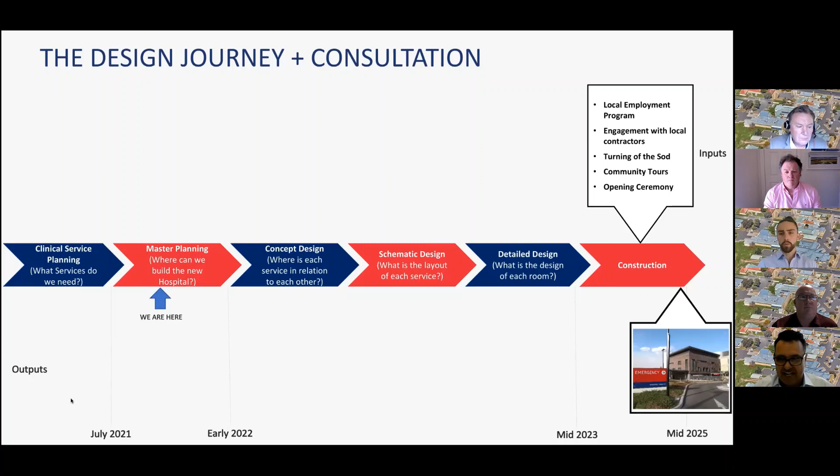There'll be a number of ceremonial opportunities for staff and community to engage, like turning the first sod. There'll be tours and an opening ceremony, of course. There's a lot more detail behind that, but I just wanted to give you a sense of the major areas and touch points throughout the project. And at the end, we hope to deliver you an exceptional building.

I'm going to introduce Mark Brockbank, Director of Rural and Regional for Health Infrastructure. Whenever we have a major project in New South Wales, Health Infrastructure plays a senior role in partnering with the district and local staff to help deliver that project. They have exceptional expertise in delivering large-scale projects, and Mark is probably the best person they have. We're incredibly lucky to have him on this project, and he's a good man despite coming from South Africa. He's embedded himself in rural New South Wales, and I'll hand over to Mark now to introduce the rest of the team.

Thank you, Ramsey. I trust you all can hear me. Thank you for the introduction, and thank you for your comprehensive presentation regarding the program and the process. I'm pleased to be representing Health Infrastructure today on this project and joining you on this virtual update. To support the planning of the project, we have pulled together a genuinely skilled team, and they will be working alongside Ramsey's team, the Hunter New England team, and with you and the community. So I'd like to introduce you.

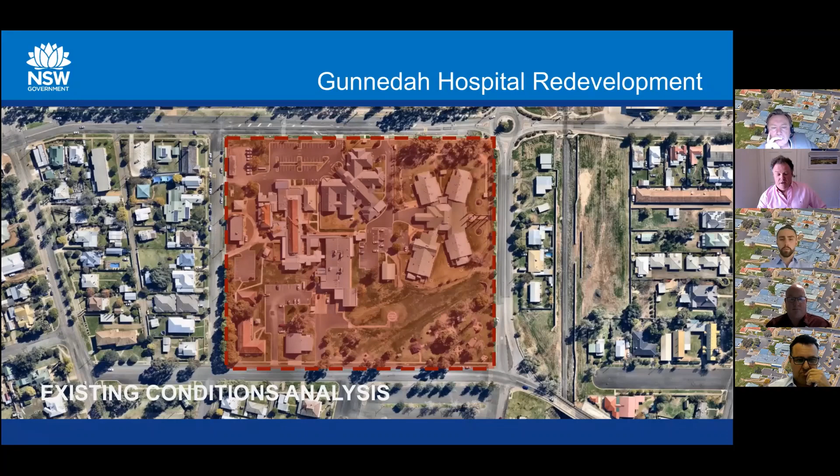It's really important that when we're doing master planning, we have to understand the site. This is crucial to what we're doing, so we understand everything that's in the site, everything that's around the site. Because we are just doing this master plan for the current scheme, but we've also got to think of the future as well, and what the site can be used for, as we move through it. So obviously that's the hospital site.

What we start off with is, and I'll just run through some of the slides that we've done, just to give you an idea of the amount of work that we do. So you can see that the red box, which has got the dotted lines on it, that's the site I just showed you there. That's the Gunnedah Hospital site.

So we look at the planning legislation to let us know what the land is zoned for, what we can do with the heights, what we can do with the land, what we can do with everything round about it.

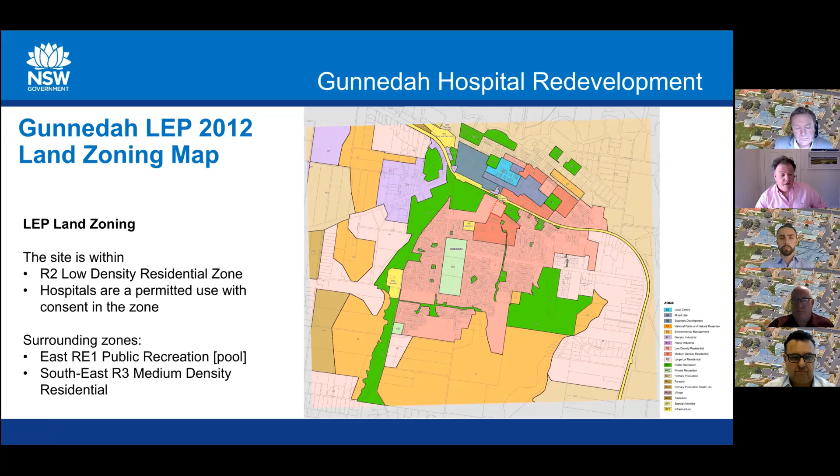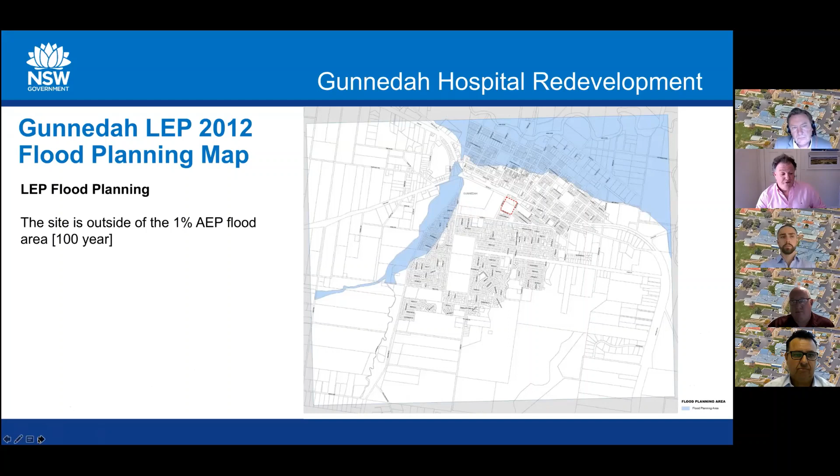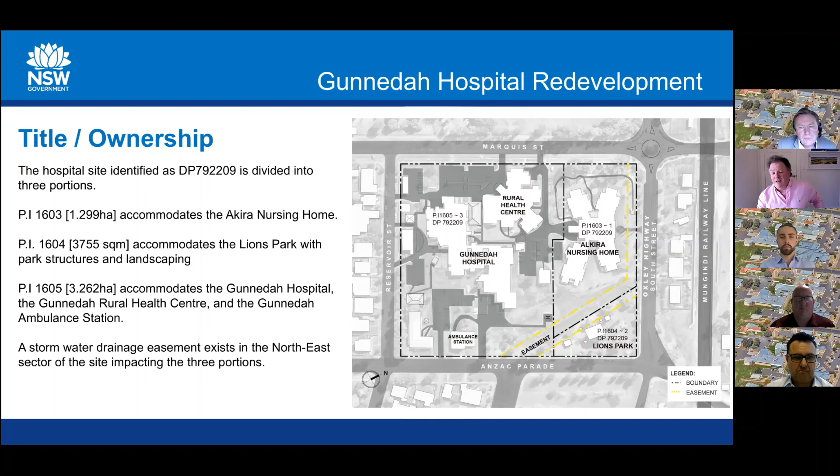What's also important is that we've found the easement for the drainage channel that runs through the site, sort of cutting Lions Park off from Alkira Nursing Home. So that area of land that's not really built on is not built on for a reason - there's a large drainage easement that gets full of water, and that gives us ideas. All these slides just give us lots of little clues, so we can put a jigsaw puzzle of the building together, and it tells us where things could be and where things shouldn't be. We have to keep an open mind as well.

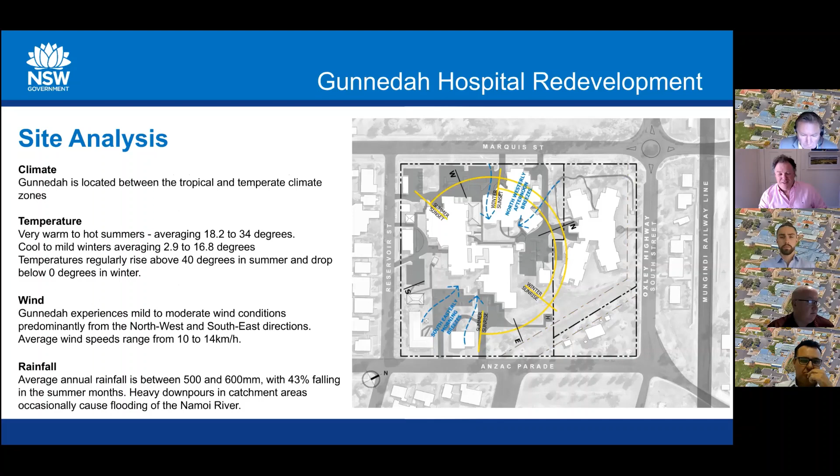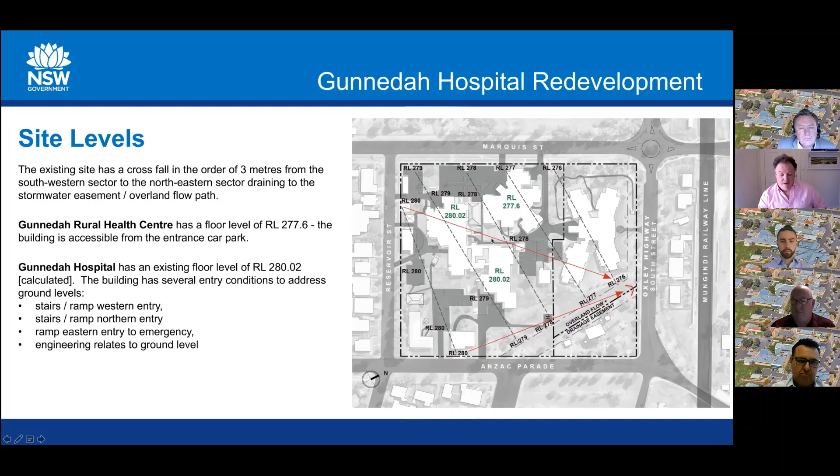We've got to understand all of these because every link into the site represents something, and it also tells us where the busier roads are and where the less busy roads are, because we don't want an entrance to a hospital off a really busy road. We'd rather have it off a quieter road so there's easy access in and out. So it's about building a picture of what actually goes on at the site.

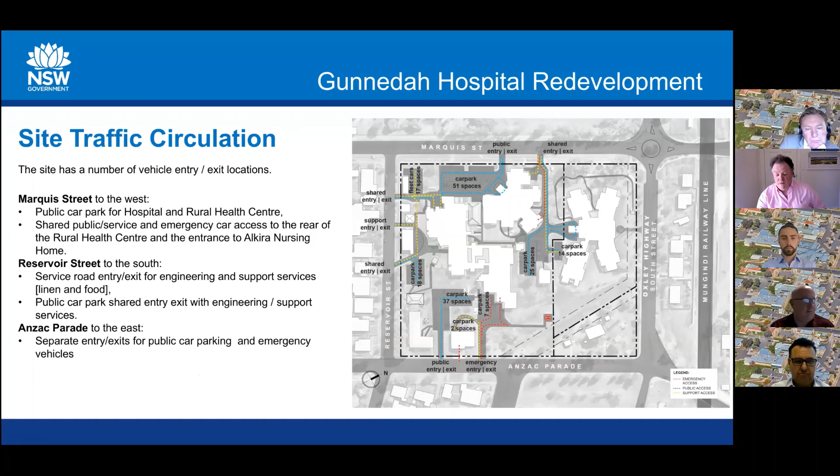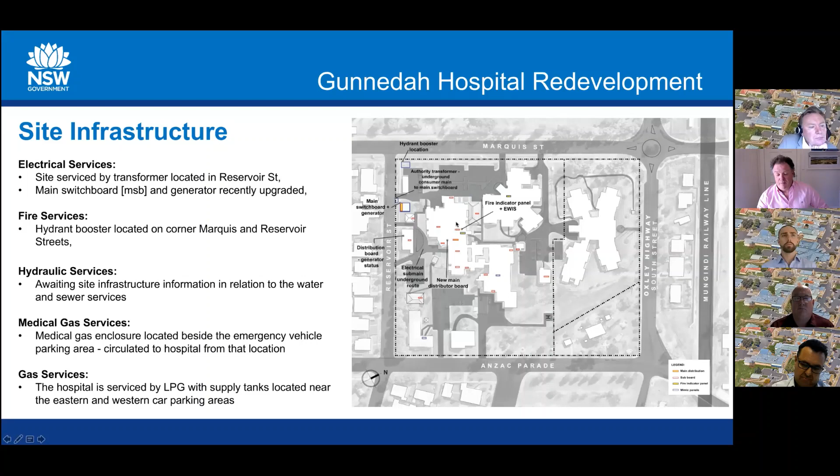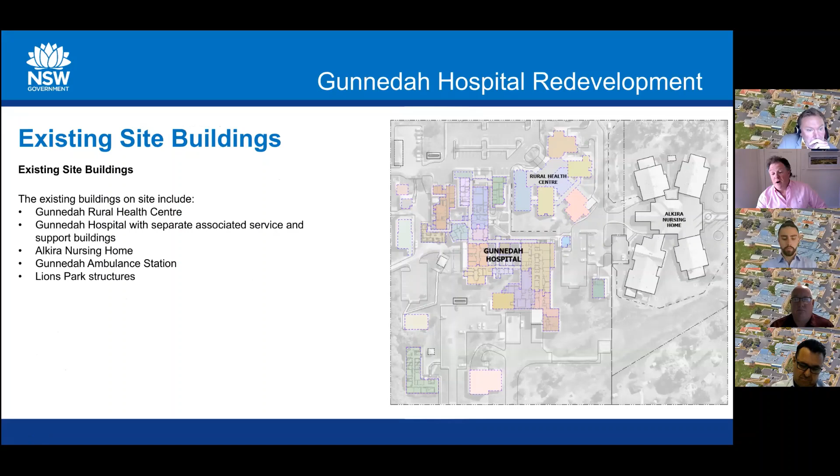So you can see we're starting to build a layer of pictures together that we'll use for master planning. We also look at existing site buildings, because the existing site and the relationships between spaces are very important. The site has the rural health centre with its entrance and drop off, Gunnedah Hospital with its associated services, the nursing home, the ambulance station, and the Lions Park. How these fit together is really important.

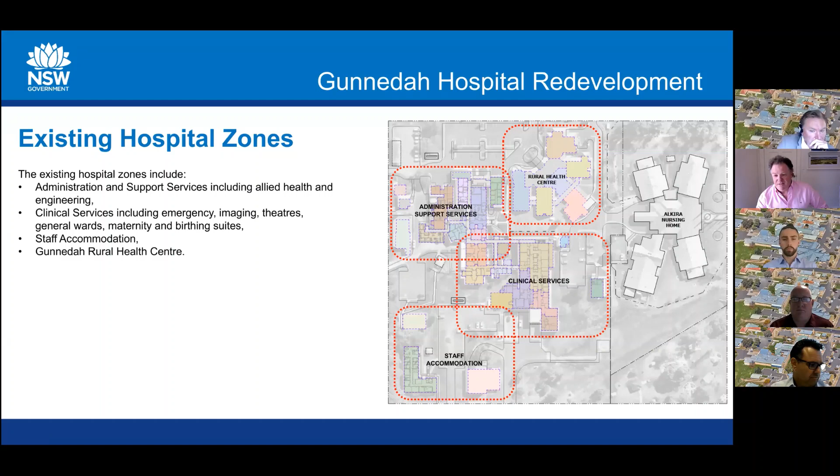And then at the rear, we've got the ambulance station and staff accommodation. So again, that's building more of the picture of what's there at present, which will help us move forward with what we want to do in the future. So that's just a small snapshot of what we've been doing.

We put together a large master plan report that includes a whole bunch of other disciplines as well, not just architects - we have town planners, mechanical engineers, electrical engineers, etc. We all work on this site analysis, which drives the master plan.